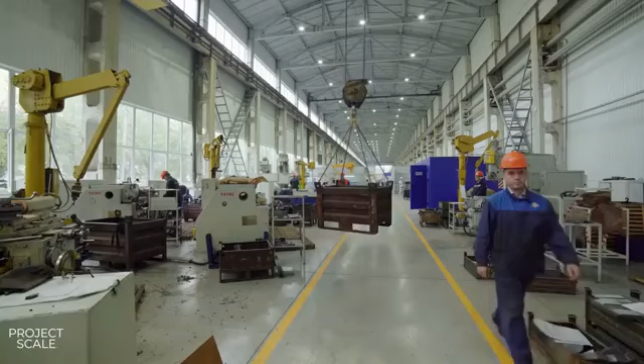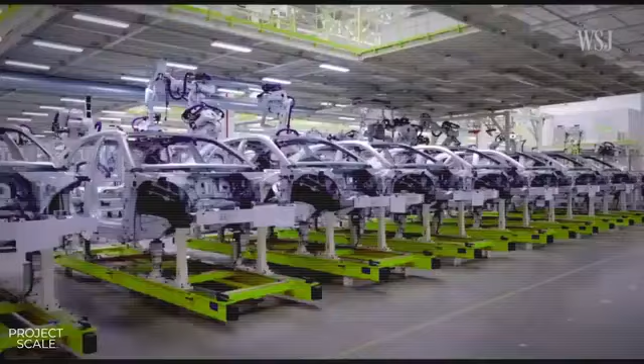The lights in this factory have not been switched on in over 3 years, not because it shut down, because it never needed them. Inside, robotic arms move through absolute darkness, picking, welding, and assembling at a pace no human shift could match. No coffee breaks, no safety lighting, no shift changes at 6 a.m.

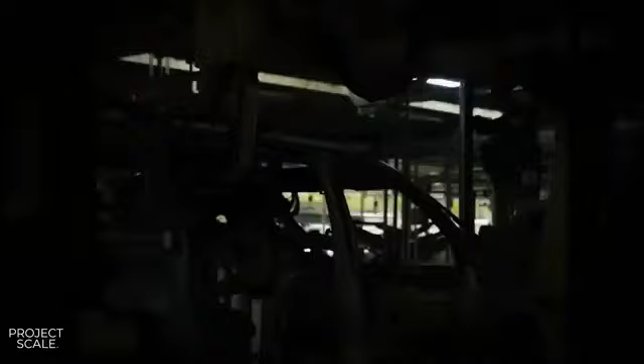The facility is called the Midea Smart Manufacturing Complex. It sits in Shunde, Guangdong province. It cost $1.2 billion to build, and from the outside, at any hour of the day or night, it is completely dark. China has been building facilities like this since 2015.

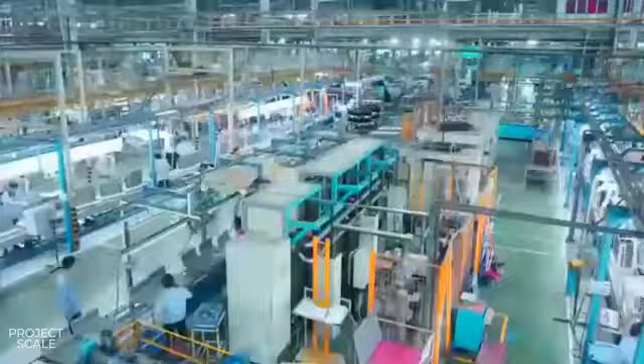By the early 2020s, the Ministry of Industry and Information Technology had certified hundreds of sites meeting its smart manufacturing benchmark, a program expanding faster than any comparable initiative in Germany, Japan, or the United States. What nobody has explained is why China needed them to scale this fast.

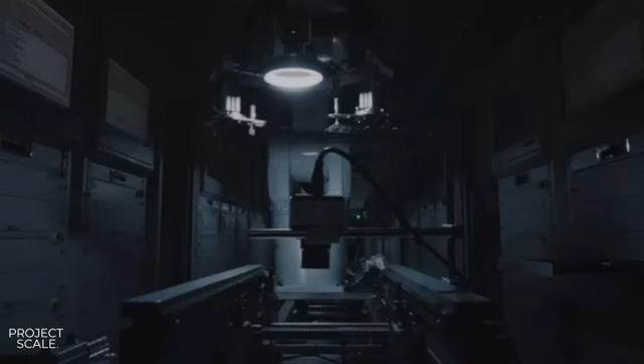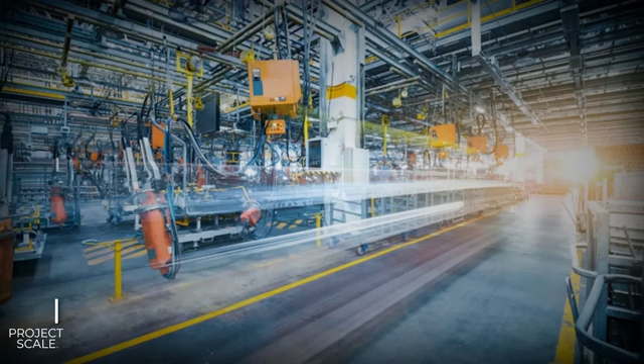If you manufacture anything, or if your job depends on a company that does, this type of facility is already competing with your supply chain. The Fanuc Corporation plant in Oshino, Japan has run lights out since 2001. Engineers there considered it a proof of concept for future decades.

China looked at that model and decided the future was now, not in one factory. In dozens, then hundreds, then a national program with a name and a budget line. The problem China was solving had a specific deadline attached to it.

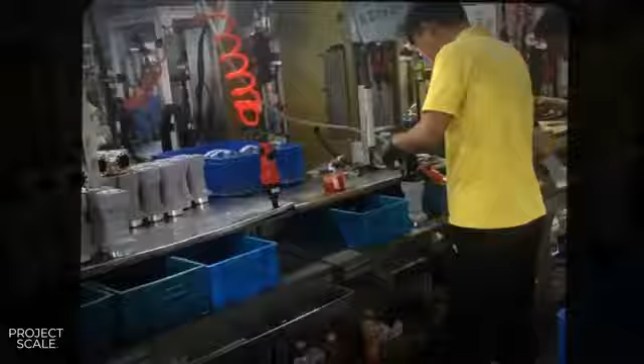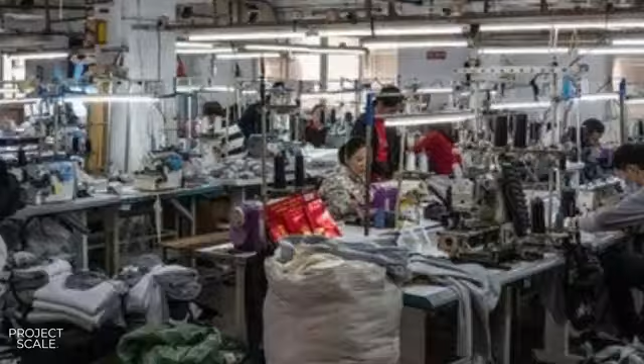By 2021, Chinese manufacturing wages had risen approximately 300% over 15 years, according to the National Bureau of Statistics of China. The cost advantage that built the world's factory floor was compressing. The math that had made China the manufacturing capital of the world for 40 years was starting to fail.

Government planners formalized the response in a document released on May 19, 2015. Made in China 2025, authored by the State Council in consultation with the Chinese Academy of Engineering, set numerical targets that most Western economists publicly dismissed as politically optimistic at the time. 3 numbers explain what happened next.

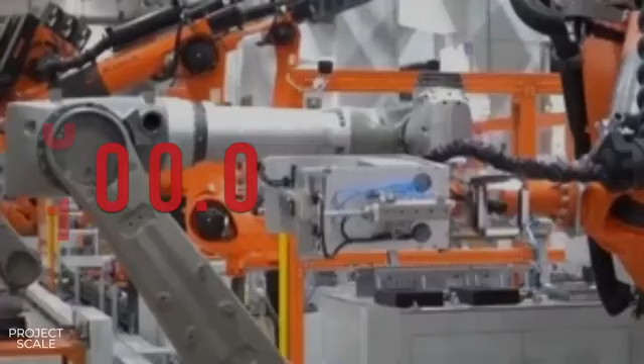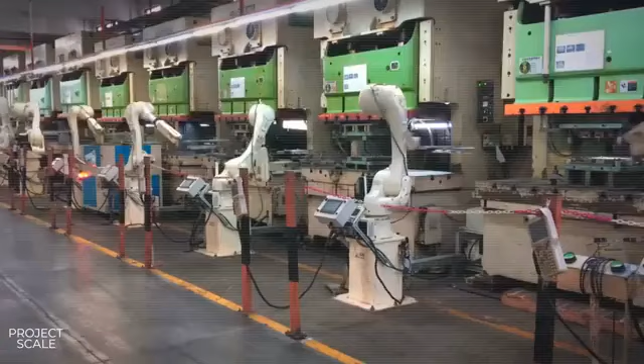China installed 290,258 industrial robots in 2022 alone, more than every other country in the world combined, according to the International Federation of Robotics 2023 World Robotics Report. That is the equivalent of deploying 1 fully operational robot for every worker currently employed in the city of Pittsburgh in a single calendar year.

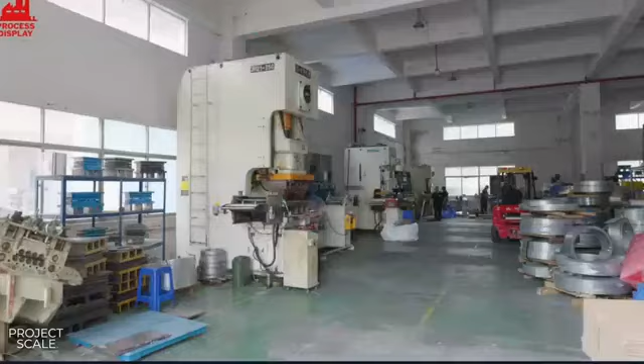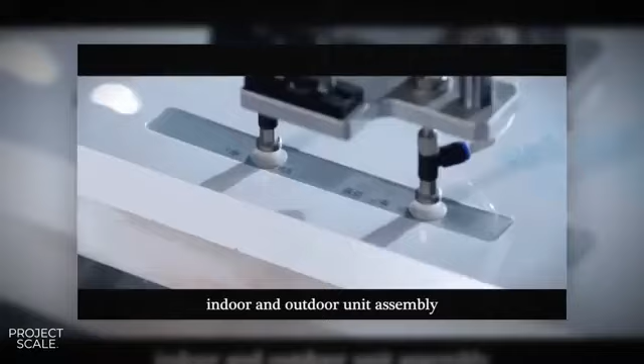The Changying Precision Technology Facility in Dongguan, a smaller predecessor to the Midea complex, reduced its human workforce from 650 employees to 60, while reporting a 3-fold increase in output. The 60 remaining workers do not operate machines. They monitor the systems that operate the machines.

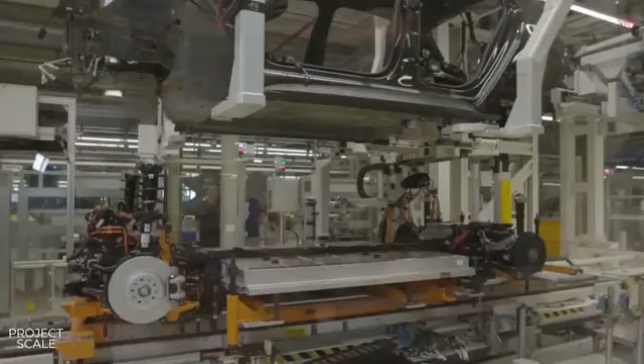And then there is Germany. Volkswagen converted its Zwickau plant to full electric vehicle production starting in 2018. It opened in late 2019. It cost around 1.2 billion euros. It employs approximately 8,000 people on the production floor today.

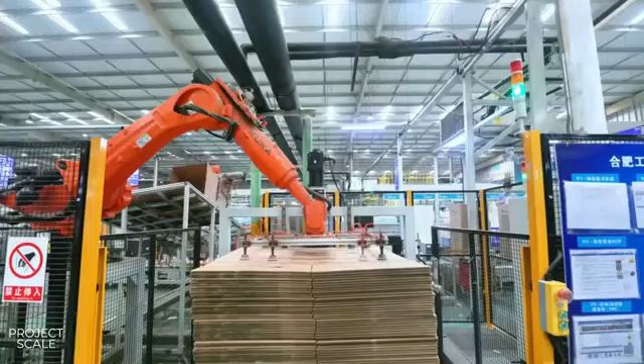Dongguan, 60 people. Zwickau, 8,000 people. Same category of facility, same approximate cost range. The difference in that headcount number is not an accident of ambition or technology. It is the result of a decision made at a policy level a decade earlier, and to understand what that decision actually was, you need to go back to the moment it happened.

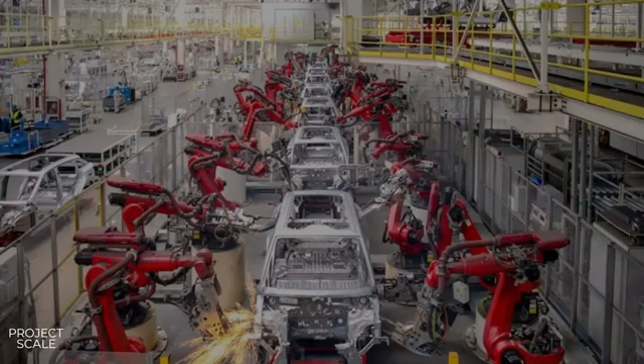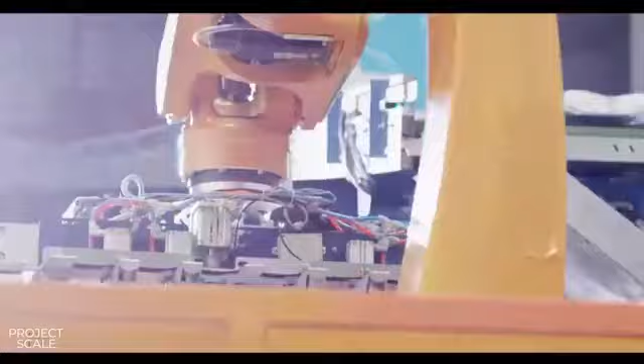The precise moment China's automation strategy shifted from aspiration to mandate can be traced to that 2015 document. Made in China 2025 set a robot density target that seemed at the time disconnected from reality. Chinese manufacturers were to achieve 150 robots per 10,000 workers by 2020. In 2015, the figure stood at 36. The goal required quadrupling robot density in 5 years.

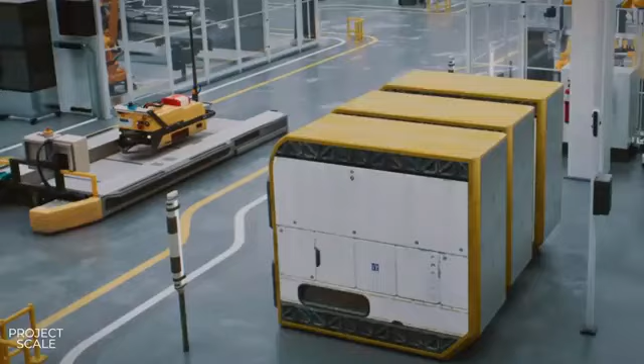They hit 246 by 2022. They passed their own target by 64%. The counterintuitive decision inside that policy was not the automation target itself. It was the instruction to build the robots domestically rather than continue importing them.

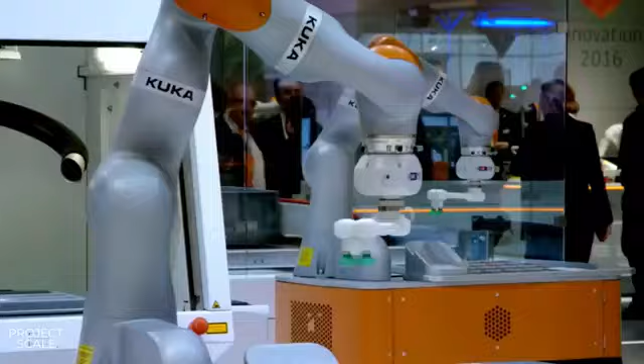China was, at the time, the world's largest buyer of industrial robots from KUKA, a German manufacturer founded in Augsburg in 1898, widely regarded as one of the 3 best robotics companies on the planet. In 2016, Chinese appliance maker Midea Group acquired KUKA outright for 4.5 billion euros.

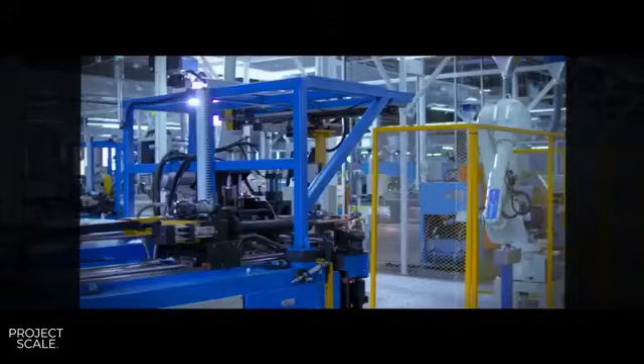A company whose primary product was air conditioners had just purchased one of the most sophisticated robotics manufacturers in the world. The technology transfer that might have taken 20 years through gradual licensing agreements happened in a single transaction. At the time of the deal, financial analysts questioned whether Midea understood what it had bought.

The Wall Street Journal, Reuters, and Bloomberg all covered the acquisition with notable skepticism. A Chinese appliance manufacturer owning German precision robotics seemed, on the surface, like a category error. The answer to that skepticism became clear over the following 7 years. By 2023, Chinese-manufactured robots, primarily from domestic firms Estun, Siasun, and Inovance, held roughly 36% of the Chinese domestic market. In 2015, before the KUKA acquisition reshaped the competitive landscape, that figure was under 10%.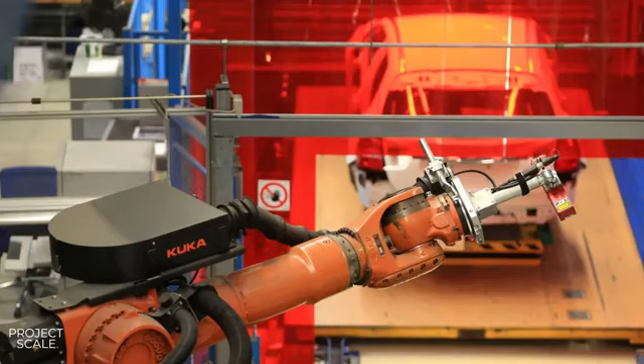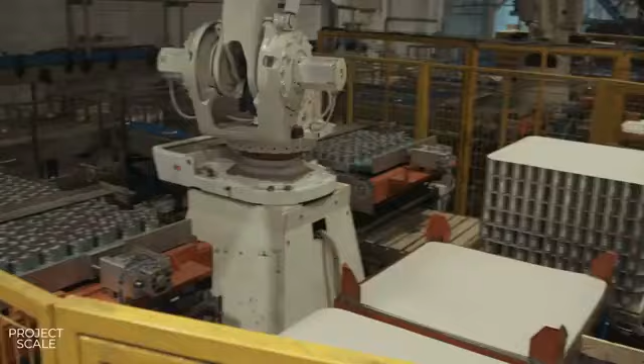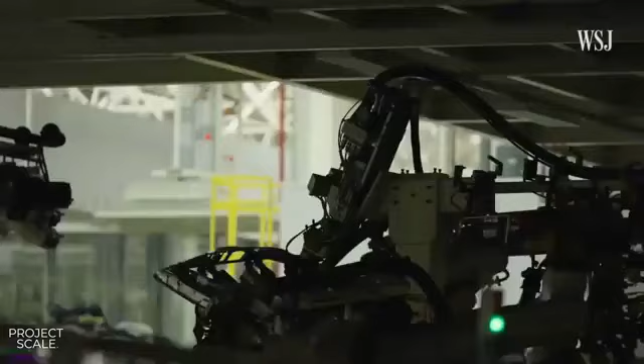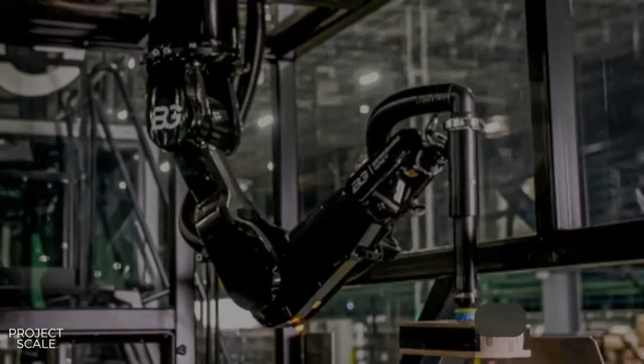The lights-out factory concept did not originate in China. The decision to deploy it at the scale of a national infrastructure program did. Stand at the entrance of the Chang'an facility in Dongguan at midnight, and the first thing you register is the sound. Not silence, machinery. But the kind of machinery that makes no accommodation for human presence. No warning beeps at corridor intersections. No emergency lighting strips along the floor. The automated guided vehicles navigating the production floor do not produce visible light. They run on LiDAR and millimeter-wave radar, locating themselves and each other in complete darkness with sub-centimeter precision.

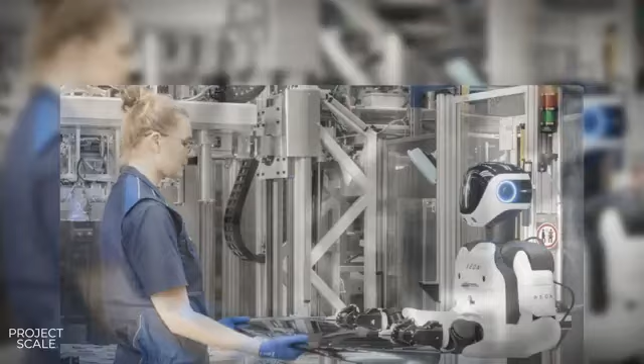A correspondent for MIT Technology Review who toured a comparable Midea lights-out facility described the experience this way. The disorienting part was not the darkness itself. It was the sound of machines moving around you without registering that you were there. The systems did not slow down or reroute for a human standing in the space. The human was an obstacle in a system not designed to have obstacles. That observation from an outside reporter, not a company press release, captures something that production statistics cannot.

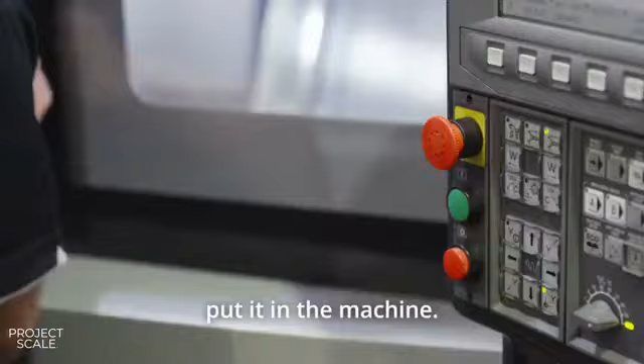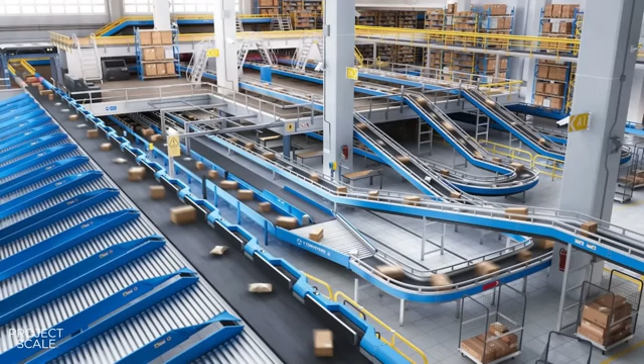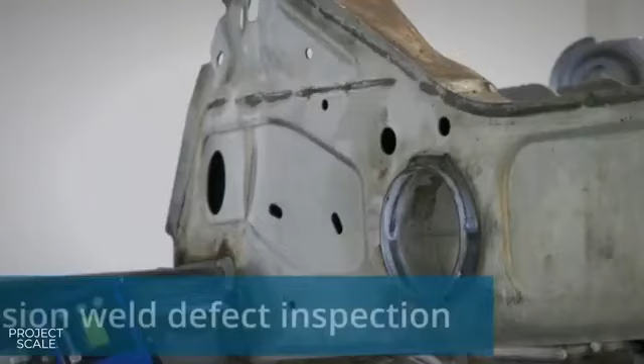The facility operates across multiple zones. The machining area handles raw CNC operations. Metal blanks enter one end shaped like rough cylinders, and precision components exit the other. The entire sequence runs without a human hand touching the material. Think of it like a postal sorting system, but each item weighs 4 kilograms and arrives in the wrong shape. The precision assembly zone works at tolerances measured in microns, millionths of a meter. This is where lights-out manufacturing makes its clearest quality argument. A human hand, regardless of training, introduces variability at this scale. Robotic actuators guided by optical feedback do not.

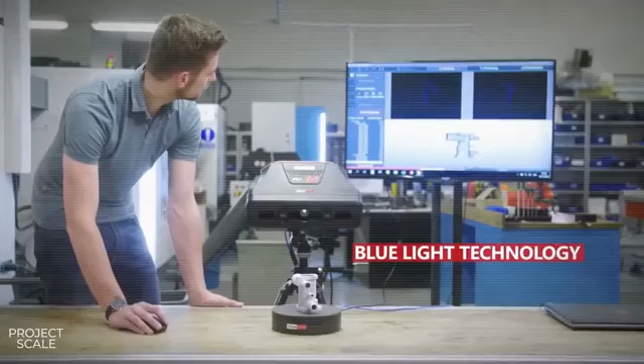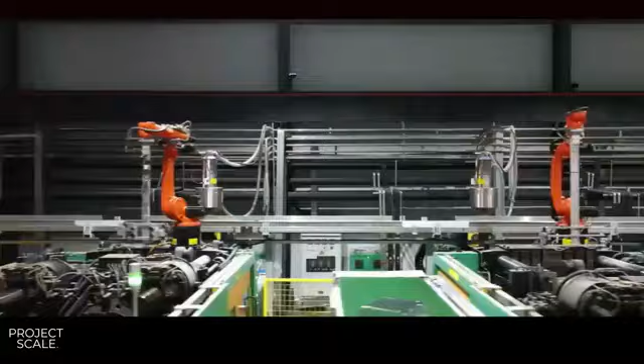Every finished component passes through three-dimensional optical scanning. Defect detection rates at facilities using this approach run significantly higher than conventional human visual inspection, according to benchmarks published by China's Ministry of Industry and Information Technology. The architecture that makes the facility resilient is the edge computing layer. Each robotic system carries its own local processing, running independently of any central server. The factory does not depend on a continuous network connection to function. A network outage does not stop the floor. That solved the single point of failure problem that had undermined earlier automation attempts.

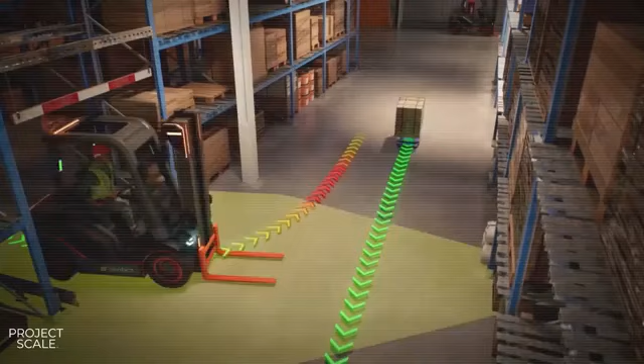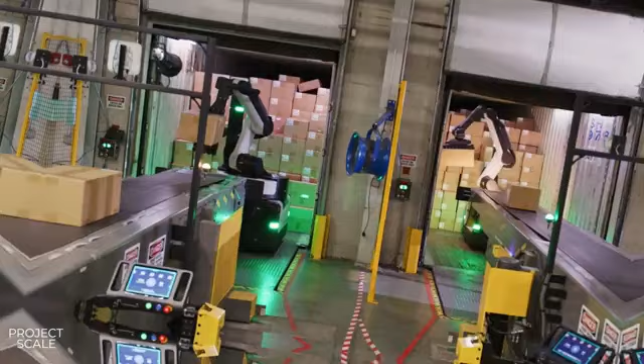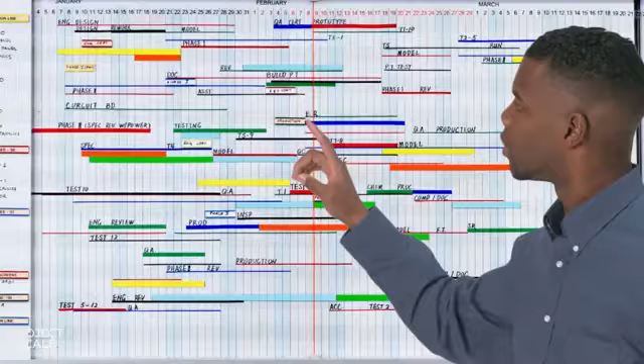It created a different one nobody had anticipated. When dozens of independent autonomous systems make routing and sequencing decisions simultaneously in close physical proximity, they develop conflicts the original programming did not account for. Two systems reach the same intersection from different directions. A finished component is needed in two places at once. The Chang'an operations team spent over a year of live production developing conflict resolution logic, not in a laboratory, but by watching what the deployed systems actually did and writing rules around the behavior they observed. The factory debugged itself by running.

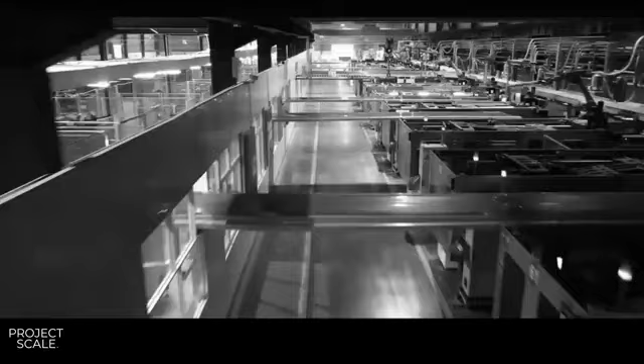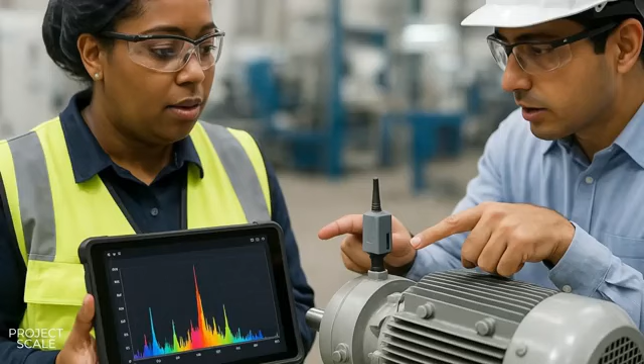On September 22, 2015, the Chang'an facility completed its first full lights-out production cycle. Continuous operation with 0 human operators on the floor. The reported defect rate was 0.01%. At a human-operated facility of similar scale and product type, defect rates typically run between 1.5% and 3%, depending on component category, according to benchmarks from the American Society for Quality. That gap, measured in fractions of a percent, compounds across production volumes of millions of units into a cost difference that shows up in contract negotiations.

Engineering publications noted the Chang'an result not as a novelty, but as a template. The facility reached full capacity in under a year, a commissioning timeline that European industrial planners, accustomed to multi-year ramp-up periods, found difficult to account for in their competitive models. But Chang'an was not the destination. It was the proof of concept run.

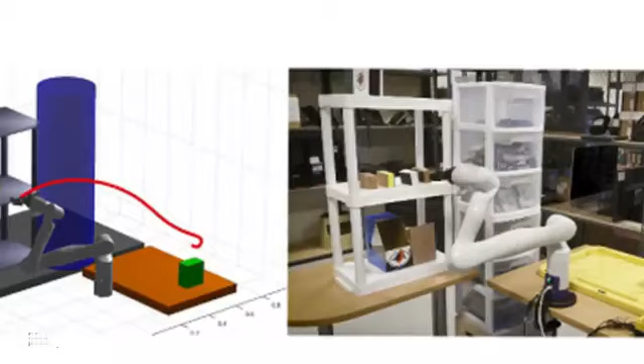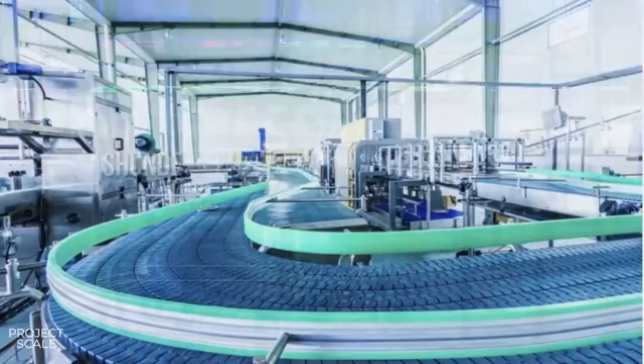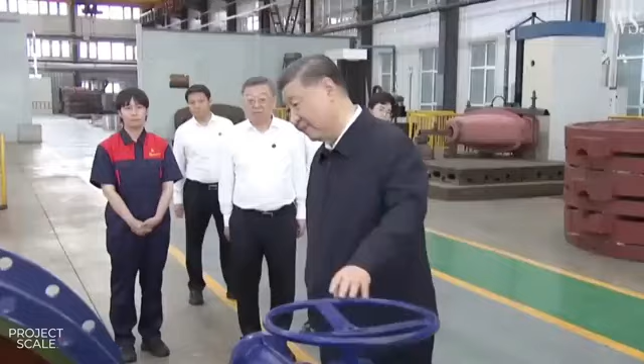What China tested in Dongguan in 2015 became the construction blueprint for the Midea complex in Shunde, the $1.2 billion facility named in this video's title. Shunde operates at a scale that makes Chang'an look like an early prototype. It is the facility the Ministry of Industry and Information Technology points to when other countries ask what a national smart manufacturing benchmark actually looks like at full deployment.

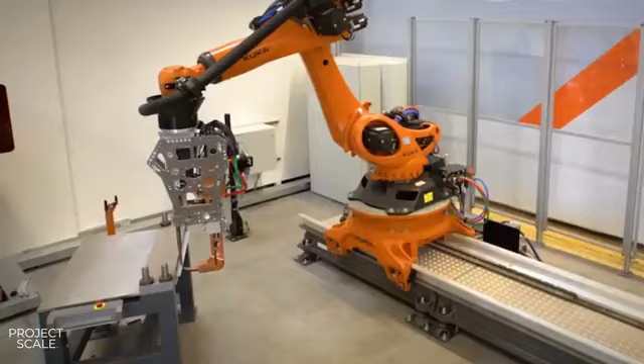Here is what almost no Western coverage of China's automation push actually examines. In 2018, a mid-sized automotive components manufacturer in Baden-Württemberg, Germany, began the approval process for a new, fully automated production facility near Stuttgart. The company had the capital. It had selected the equipment suppliers. It had identified the site. By 2023, 5 years later, construction had not started.

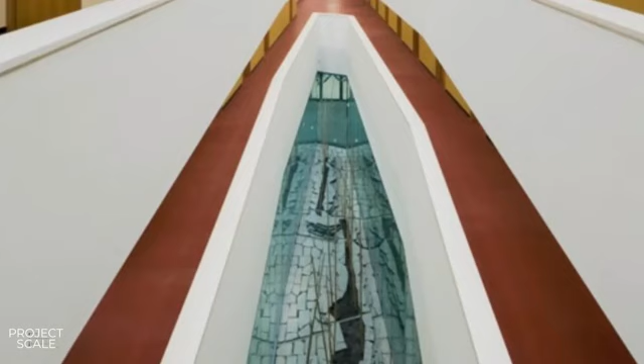The facility was still working through environmental impact assessment, 2 rounds of zoning review, union consultation required under German co-determination law, and grid connection authorization from a regional utility. Every stage involved a different regulatory body. Every stage had its own timeline. None of them ran in parallel.

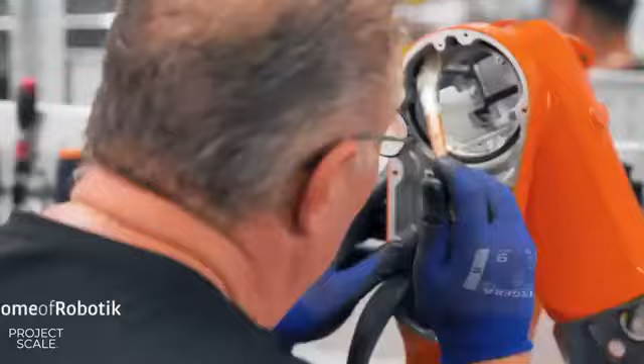This is not a story about German incompetence. Germany has the engineers. Germany builds better robots than China currently imports. What Germany has is a governance structure built around a different set of priorities: labor rights, environmental review, democratic accountability, that were designed before lights-out manufacturing existed as a concept. The approval process was not built for a factory that has no workers and runs at 3 a.m.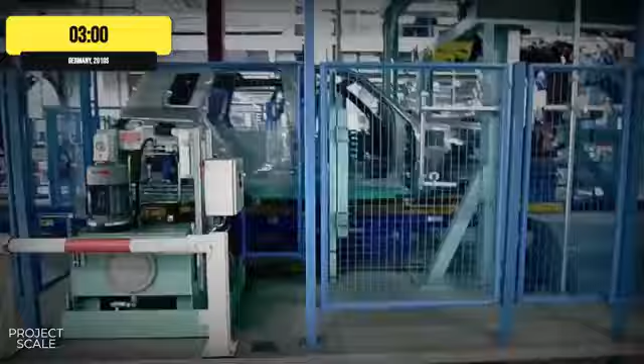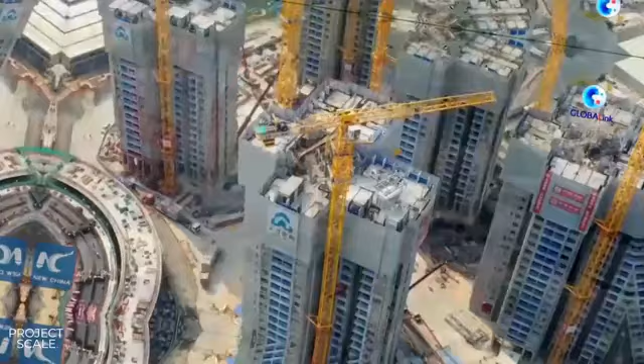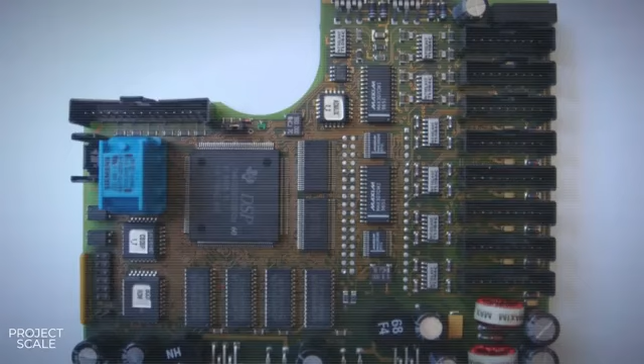China's designated smart manufacturing zones operate under a different architecture. Local government approvals, national ministry certification, and construction proceed simultaneously. The result is a land-to-first production timeline that runs between 2 and 3 years in designated zones, compared to 5 to 10 years in the European equivalent, even under favorable conditions. The gap is not technology. The gap is the calendar.

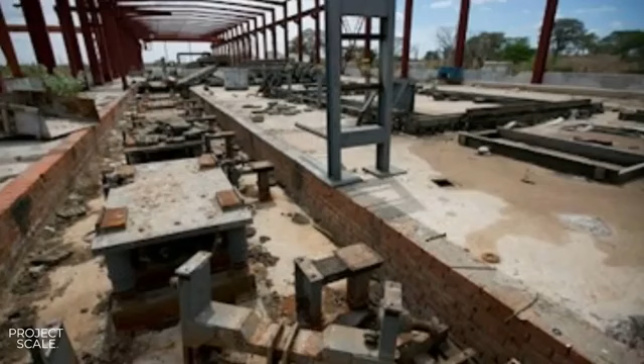This is the asymmetry that Western manufacturing executives are now trying to explain to their boards. It is not why they lost the technology race, but why a race that runs on approval timelines is one they have no structural mechanism to win at current speed.

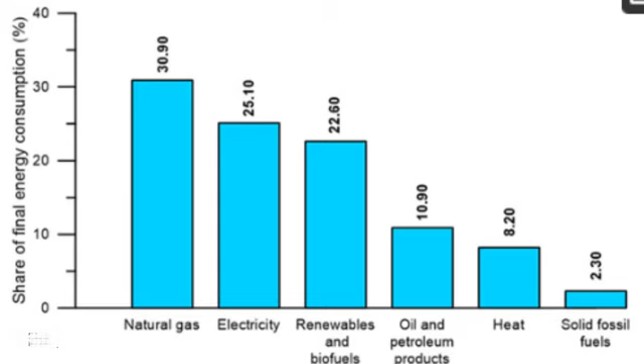Here is the number that stops people mid-sentence. A lights-out facility running at full capacity can match or exceed the output of 2,000 manual workers, running 24 hours a day, 365 days a year, with no sick days, no shift premiums, no turnover, and no pandemic risk. The energy cost per unit runs lower than a conventionally operated facility of equivalent size, because heating, lighting, and human comfort infrastructure is removed entirely.

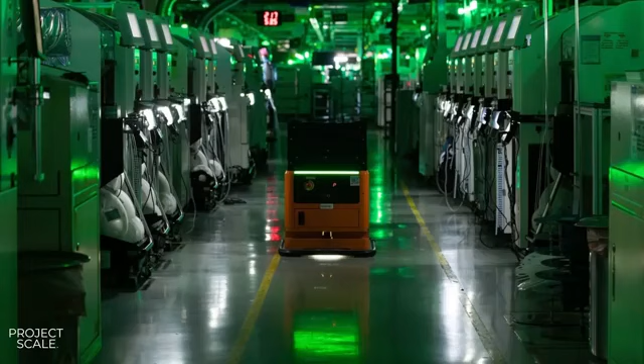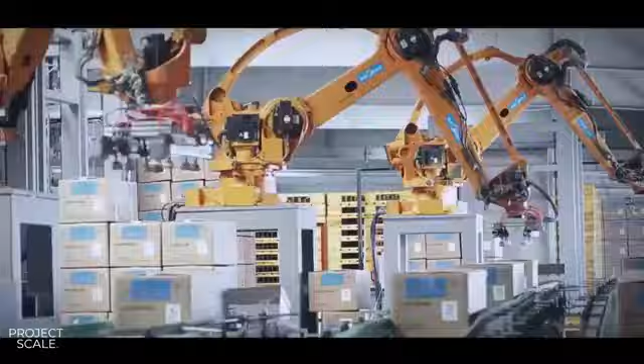3 things look different now than they did 15 minutes ago. The first, the phrase "made in China" no longer describes a labor cost strategy. It increasingly describes a production architecture, one where the question is not how many workers are on the floor, but whether there are any workers on the floor at all.

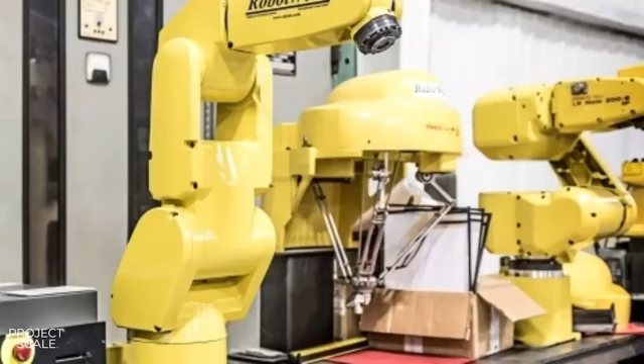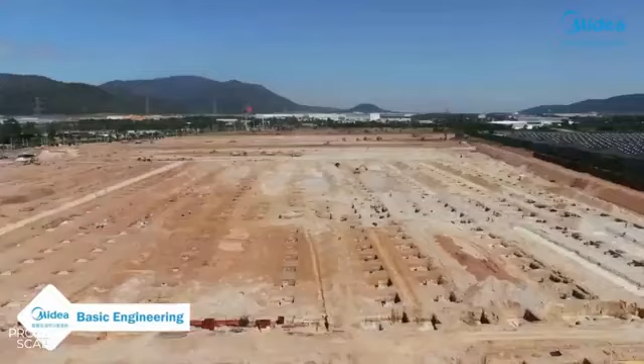The second, the competition between Eastern and Western manufacturing is not a technology race. Western nations have the robotics capability. Germany built KUKA. Japan built FANUC. The United States has the capital markets to fund deployment at scale. What none of them has is a regulatory and governance framework designed to approve and build these facilities at the speed the technology now allows. That is a harder problem to solve than building a better robot arm.

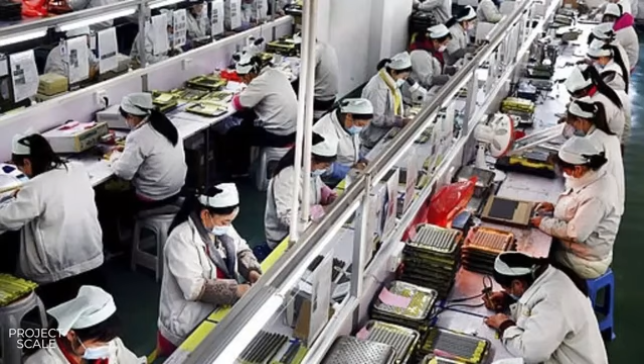The third, China did not build lights-out factories to replace workers. It built them to remove the category of risk that workers represent: illness, wage pressure, turnover, labor disputes, pandemics. The factory that cannot be disrupted by a human decision is a strategically different asset from one that can.

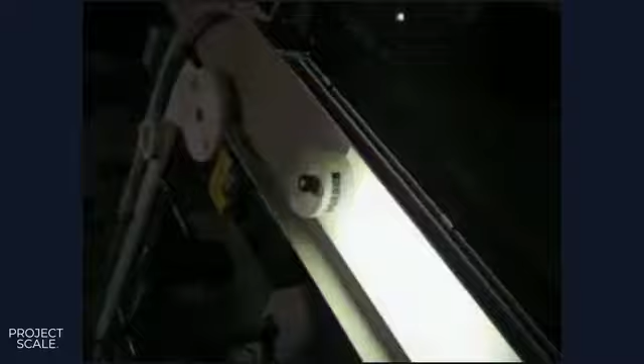By 2030, China's Ministry of Industry and Information Technology has projected that the majority of large-scale facilities in its designated smart manufacturing zones will meet lights-out certification standards. The Sichuan corridor, which includes aerospace and precision components manufacturing, is a priority transition target within that timeline.

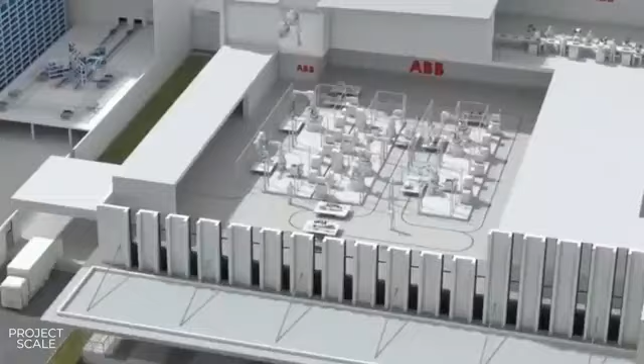The engineers who designed Changying in 2014 have long since moved to the next project. Several of those projects involve not just autonomous production, but autonomous process optimization. These are systems that observe their own output data and reconfigure assembly sequences without human instruction. That category of facility does not yet have a standard name in English.

The question worth sitting with is not whether automated manufacturing will spread. The trajectory is not in question. The question is what the global economy looks like when the competitive variable is no longer the cost of the worker, but the cost and speed of building the system that replaced them, and how long it takes your government to approve the building permit.

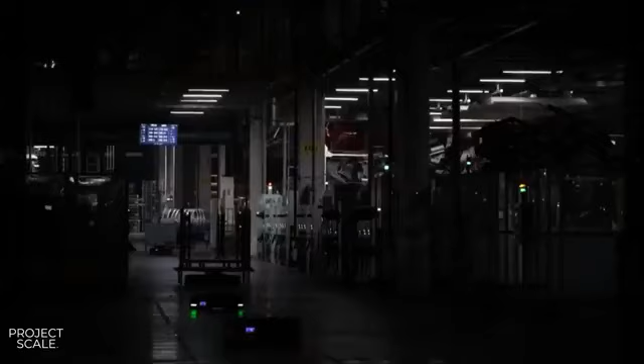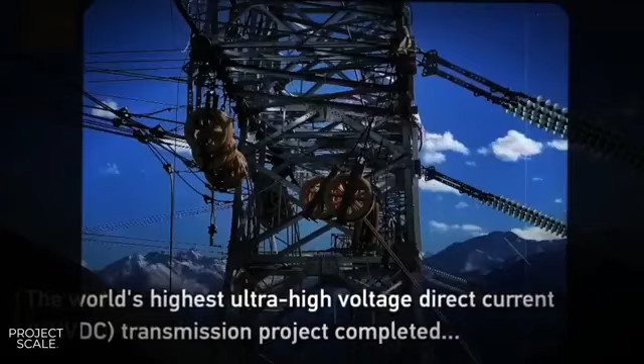If China's factory automation caught you off guard, wait until you see what they built to power it. A transmission network moving electricity across 5,000 kilometers at voltages no country had achieved at commercial scale before 2019. That one is next.